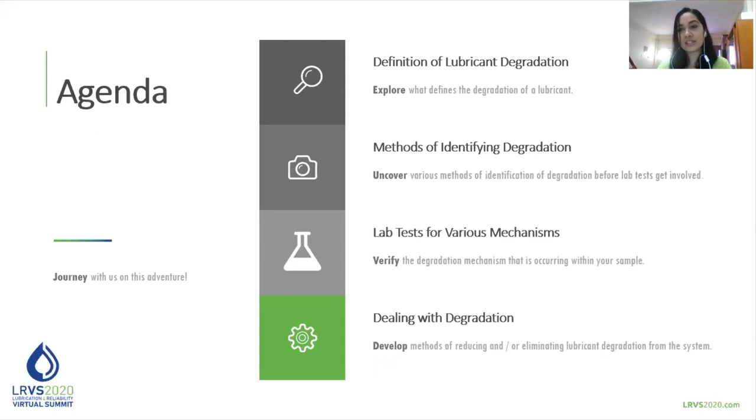And let's get into our agenda for today. So there are 4 main things that I want to focus on. The first being the definition of lubricant degradation. Now, we have to be able to define what lubricant degradation is. We have to start there. So we're just going to follow a sequence of events. So we're going to define what it is. We're going to get the methods for identifying lubricant degradation. We have to verify these things, so we need to do lab tests. And of course, we have to know how to deal with degradation. So let's jump straight into it.

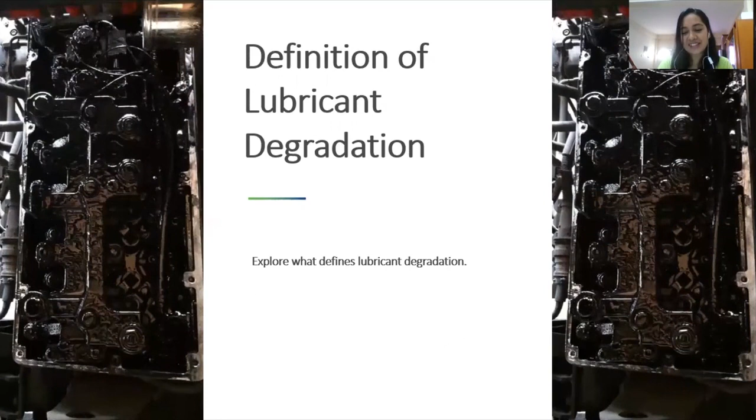Now, this is actually a picture of a diesel engine. You could tell because the oil is so dark and murky. It was an inspection that I did on a diesel engine for one of our transport providers in Trinidad. And of course, we can tell that the lubricant has been degraded. So what exactly do we mean by lubricant degradation? It's a term that people struggle with a lot. But before we even get to lubricant degradation, what are the functions of a lubricant?

Now, when we think about it logically, if your lubricant is not providing the function that it's supposed to be doing, then it's failed, in a nutshell. So ideally, if we follow that train of thought, if we define the functions of a lubricant, we can then understand why it has failed providing any of those functions.

Most people have different definitions of the functions of a lubricant. These are just 5; there are so many more out there. The 5 that I have on the screen would be to reduce friction, which is the main function of a lubricant, improve efficiency, minimize wear, distribute heat, and remove contaminants. And if you are thinking about hydraulic oils, you're actually thinking about transmitting power, so that's another function of a lubricant.

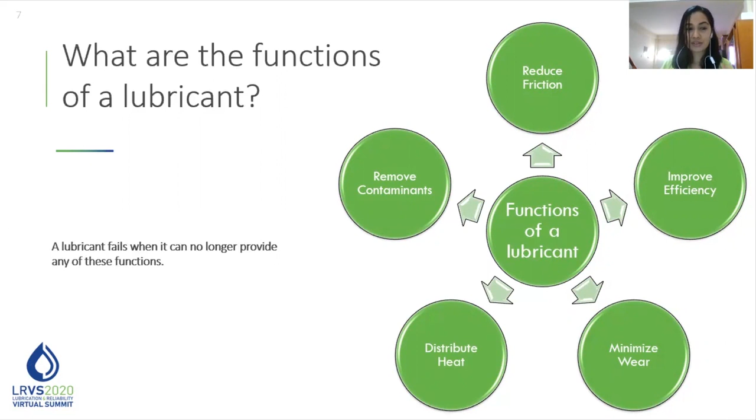If you're looking at it from the oil analysis perspective, a lubricant is a conduit of information. So if it does not provide any of those functions, essentially it has failed. So we understand when a lubricant has failed, right? That's one step. Let's think about actual degradation. Degradation happens throughout the service life of the lubricant. If it doesn't happen, then something is wrong.

I've had people tell me they've put the oil in their engines and it's still golden after about 6 months of using the engine. Something is definitely wrong there. When an engine works, it produces dirt, and one of the functions of a lubricant is to remove those contaminants and keep that dirt suspended. That is one of the reasons oil gets a darker color, if we're talking about engine oils. So if your oil is still golden after 6 months, something's wrong. It's not providing the function.

But the purpose of a lubricant in terms of degradation is that it will degrade over time. It has to degrade over time; that's one of the functions of it in a way. From the moment you put the lubricant into your equipment, you will start having degradation occurring. But there will be a point at which the degradation is at a level that the function of the lubricant is no longer served, and it can't protect the system. That's where we have an issue. So degradation occurs throughout the life; however, we need to know our limits.

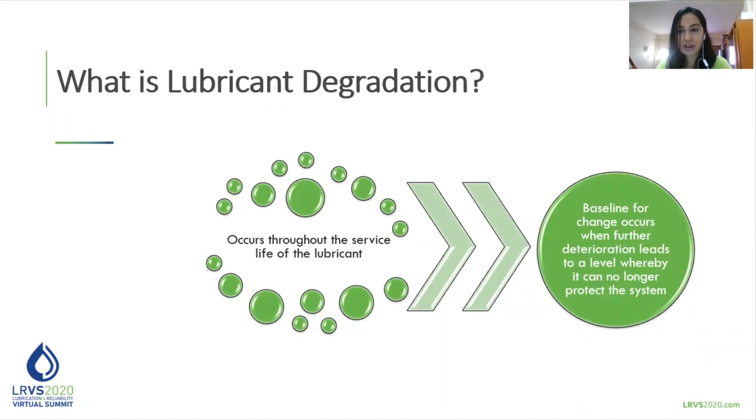Ideally, there are 6 modes of lubricant degradation. Some people argue that there are 3, but I'm sticking with the 6 because these 6 actually produce different types of things. Some people try to group them together using environmental classifications, so certain degradation mechanisms may fall under each other. But ideally, there are 6: oxidation, thermal degradation, microdieseling, electrostatic spark discharge, additive depletion, and of course, contamination, which happens no matter what. We have to try and reduce contamination as much as possible.

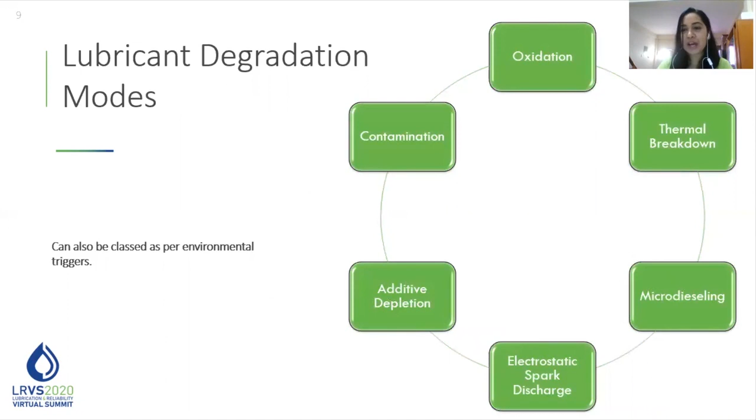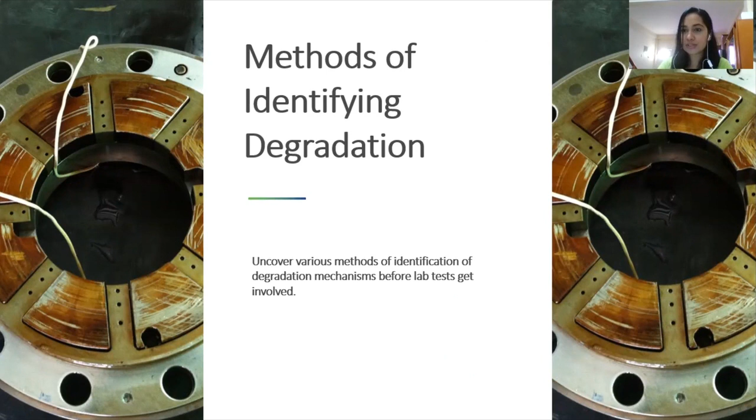I will go through these with you and help you identify the different mechanisms, because by identifying them, you can understand what is going on with your system, what we can do to help, and actually bring your system back to life in some cases. Oxidation is the one that gets the most amount of blame. Every time we have some sort of varnish or something goes wrong, somebody immediately says it's oxidation. But there is a difference between oxidation and some of the other characteristics.

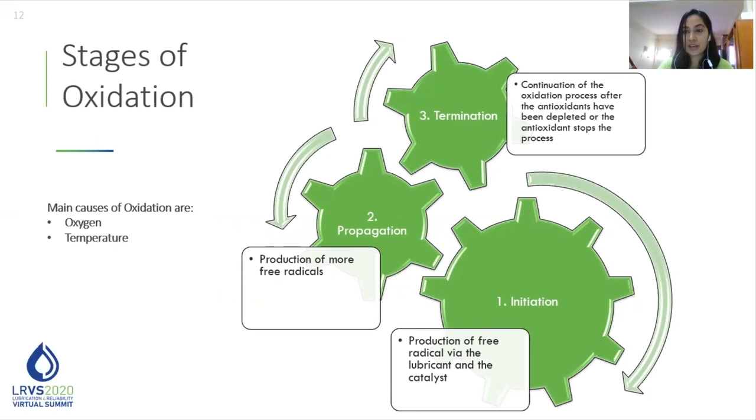So by understanding that you have oxidation occurring in your system, you can know what your results would be in terms of byproducts, and you can act accordingly. Understanding the products that may be produced when oxygen is added to the base oil helps us, because there are different stages in which oxidation could occur. For instance, perhaps your lubrication system is just now at the first stage, which is initiation.

And of course, initiation is where you have your free radical being produced. And like the name suggests, it's radical, so it needs friends. So it actually goes on to the second stage where it's propagation and it gets a lot more free radicals. And because we have this group of radicals, they go ahead and they wreak havoc throughout the entire lubricant.

And they continue doing that oxidation process until they've depleted all the antioxidants within your oil, and then they start attacking your base oil. So your antioxidants, they're like your defense mechanism, and your radicals, they go after them and they try to deplete them as much as possible.

However, if you could stop the free radical from being produced, basically stop oxidation before it started to attack your system. So understanding the different stages can help you to verify and to know where in your system you want to start with dealing with oxidation. But we will get into dealing with oxidation a little bit.

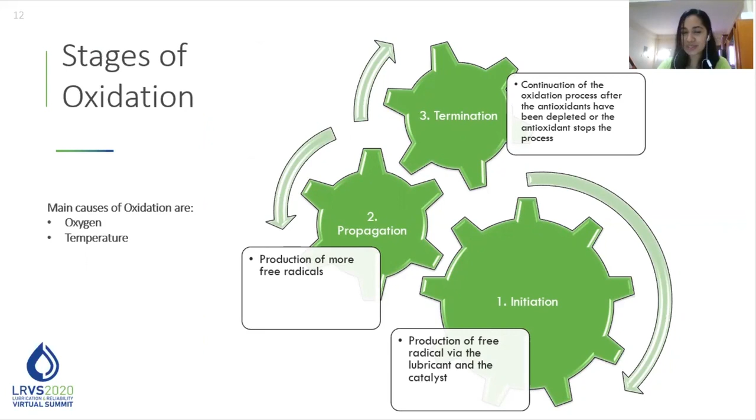Now, some of the results that we get from oxidation, you get varnish, you get sludge. And one thing that you'd realize is that you start getting an increase in viscosity. Your base oil breaks down because it's attacking your base oil. Your additives get depleted, and all your anti-foaming properties are gone out of the window. So those are some of the things that you can look for when you're looking at your results for oxidation, when you're analyzing what's going on with your system.

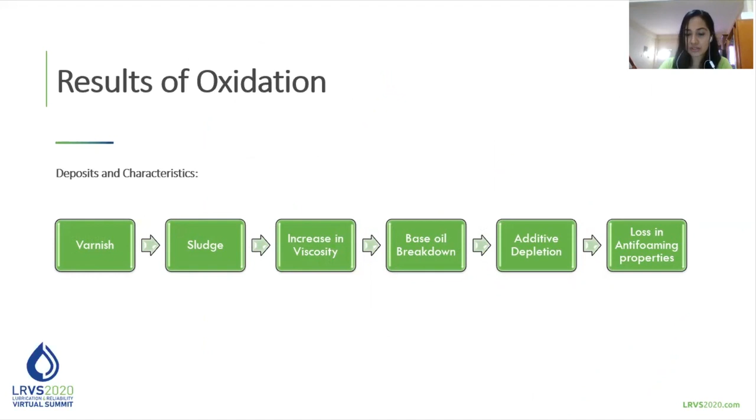Now, thermal degradation is one that is often confused with oxidation. They go together. A lot of people get them mixed up, but they're actually very different. And one of the main differences is that with oxidation, you actually need oxygen. With thermal degradation, you're looking at the thermal cracking of a lubricant, and your temperatures actually exceed 200 degrees Celsius. With oxidation, you don't have a cap on your temperature.

So in thermal degradation, what happens is that your molecules become sheared because you're telling your lubricant that we're gonna crack you. Let's think about this like in those distillation towers. They're actually exposing the lubricants to excessive amounts of heat and pressure. So your molecules are gonna start dropping off and it's gonna polymerize.

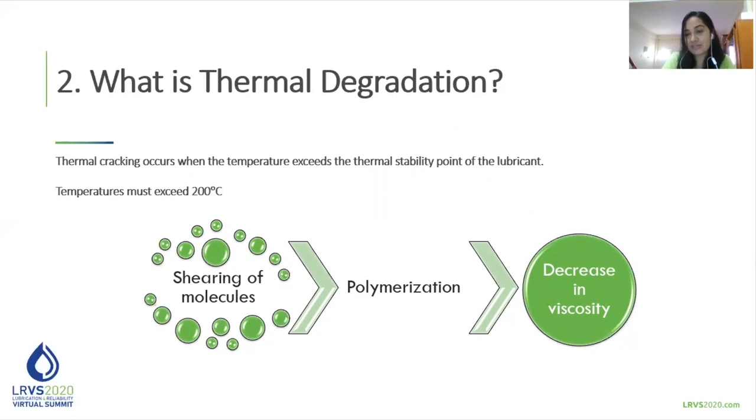And one of the main differences between your thermal degradation and your oxidation would be that you actually get a decrease in viscosity with your thermal degradation. Oxidation increases your viscosity. With the process of thermal degradation, it's actually a bit different. So when your oil becomes cracked, small molecules start coming off of the chain of your oil. And two things can happen to them.

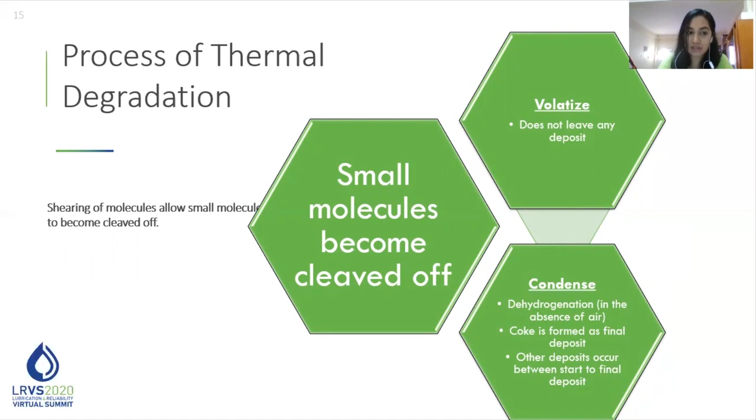Either they're volatile and don't leave any deposits, which is good in a way because we don't have as much cleanup, or they could condense and undergo dehydrogenation, and you could actually produce coke as a final deposit. So that's one of the main differences in terms of the results of what is produced by thermal degradation compared to oxidation. And I just wanted to compare that so that you all know the differences.

With oxidation, it requires oxygen. With thermal degradation, you have to have temperatures over 200 C. Oxidation, you increase in your viscosity. Thermal degradation, you decrease. Oxidation produces your varnish and your sludge. Thermal degradation, you have lacquer and carbonaceous deposits. Because remember, it's really attacking your base oil. So your base oil is really composed of carbon molecules, in essence. So you're gonna start seeing those deposits.

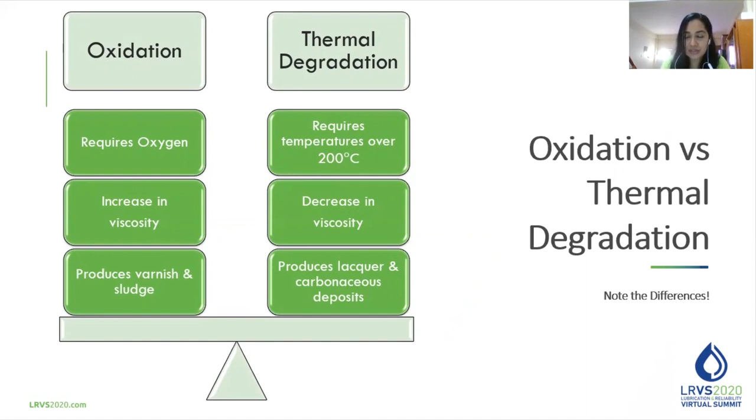Now, we're going on to microdieseling. With microdieseling, people say it is a form of thermal degradation, and it's also known as compressive heating. And what happens with that is that you actually have air bubbles that are trapped in the system. So think about when those bubbles are passing from low pressure to high pressure. What actually happens inside is that you have localized temperatures, and those temperatures could go in excess of 1000 C, which is quite a lot.

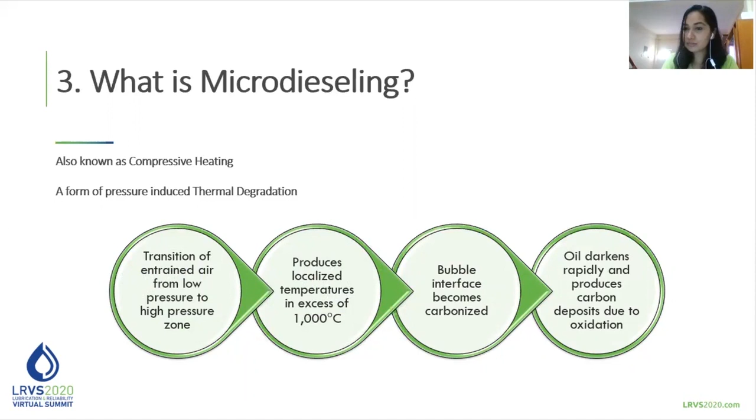And that bubble interface actually becomes carbonized. And when that becomes carbonized, that is when we start seeing your oil darkening, you start seeing change in color. And it's different because even though this is a form of thermal degradation, when the oil darkens, it produces the carbon deposits because of oxidation. So we can't exactly say that this is thermal degradation. So that's why I have it singled out as its own unique degradation mode.

And the difference with microdieseling is that it can either have a high implosion pressure or low implosion pressure. Now, what that means is that the pressure would actually dictate what happens in your system. So if you have a high implosion pressure, then the products that you're gonna get will be from incomplete combustion.

So that's what you're looking for. If you had a low implosion pressure, then you're looking for stuff like varnish, you're looking for coke, you're looking for tars, you're looking for resins. So it's a difference in terms of the pressure that the oil is actually exposed to, or rather that bubble.

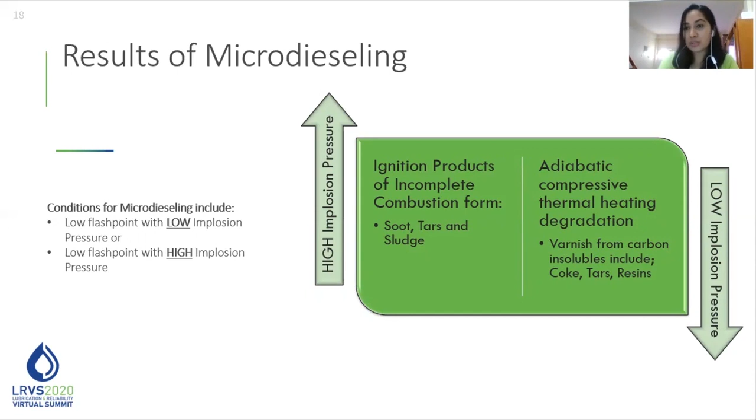Now, this one is very interesting because we have static electricity everywhere. Now, imagine if you had that static electricity inside at a molecular level in your oil. Usually if I'm walking around and I touch a door handle that is metal, I may get a shock, and that's not nice. So if that happens on the inside of your oil, it's going to be worse.

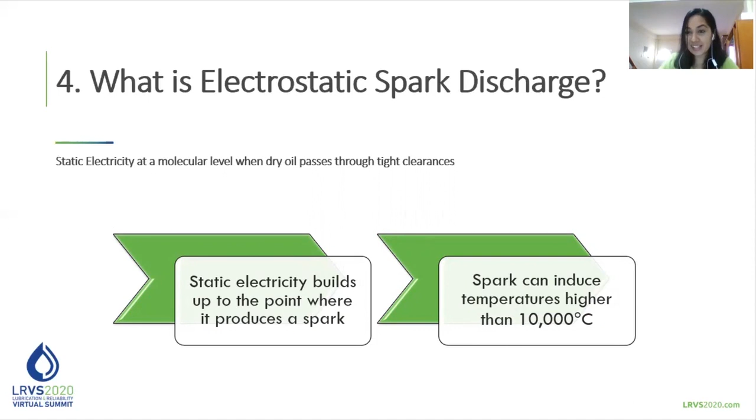And when you have static electricity at a molecular level, and you have dry oil passing through tight clearances, which just makes me think about hydraulic oils right away, it's going to be a point where all of your static electricity builds up so that it forms a spark. And now this spark could actually have temperatures in excess of 10,000 degrees C. Now, we know with lubrication, once it goes over 60 degrees C, for every 10-degree rise, oil life is halved. So imagine if it's at 10,000 degrees C, we just killed our oil.

Basically. So there are steps to ESD, of course, there are steps to all of them. What happens is that your static electricity first builds up and it produces that spark. And once it produces that spark, we have these radicals being formed again. And of course, they love friends and they will continue to polymerize your entire lubricant until it gets to a point where you just have a lot of varnish, you have a lot of sludge. Some of it may remain in solution. Some of them may drop out, they may plate out.

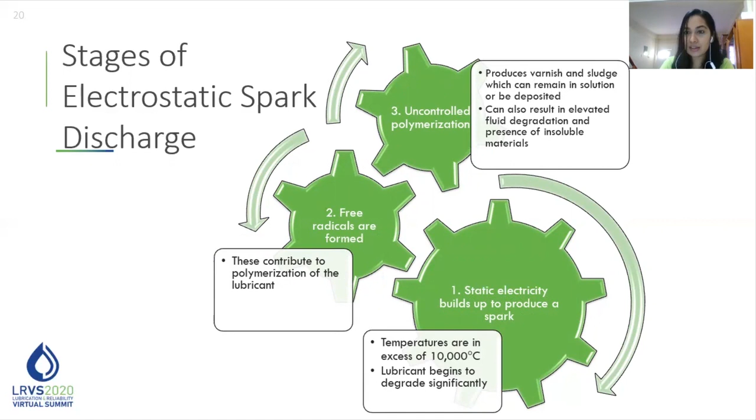But understanding that you have ESD occurring helps you to identify what mechanism you need to put into place. Because even though you have polymerization of the oil, it's not oxidation. It's because of ESD. So that's why this is a separate mechanism. And while we talked about thermal degradation, microdieseling, and electrostatic spark discharge, I want you to know some differences. Some people group all of them under thermal degradation. They may all be forms of thermal degradation, but there are differences to note.

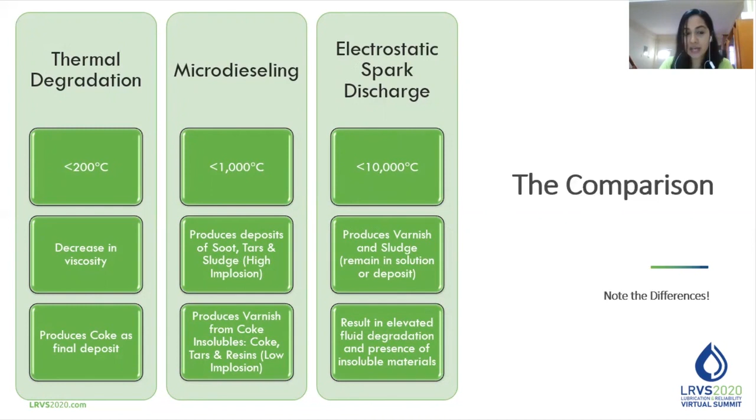And one of the main differences would be the temperatures. So if you're looking at thermal degradation, anything over 200 C. Microdieseling, it must be over 1000 C. Electrostatic spark discharge, over 10,000 C. And then you have a difference in terms of what deposits are being produced. So just be aware of that. They are not all the same. If you have thermocouples in your equipment, that helps in terms of narrowing down which one you have going on in your system. And then, of course, by the different products that are being produced.

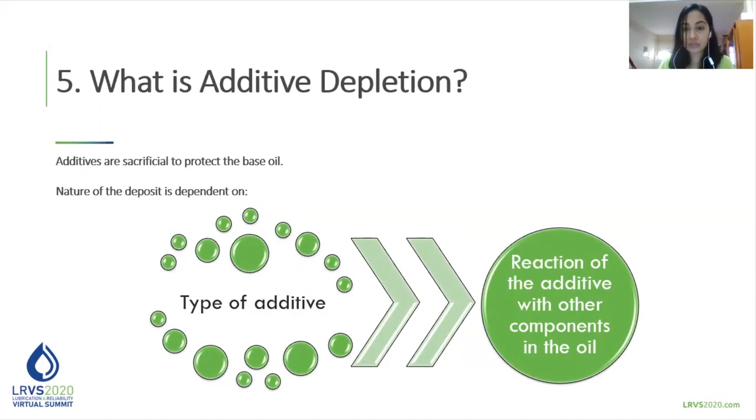If you're looking at additive depletion, most lubricants are sacrificial in nature, especially your additives. The reason that they are put into the oil is to protect the oil, to protect the equipment, but they have to be present so that they can work against the different attackers in the oil. So if you have acids in the oil, they want to fight against them. So for additive depletion, what we need to gather is the type of additive.

And with your deposits, you can have either organic deposits or inorganic deposits. Usually your organic deposits are like your rust and oxidation additives. And your inorganic deposits could be like your ZDDP, which is used to reduce wear, very important for your gear oil systems. And they may not react with anything else in your system, which is good because they just drop out and they stay there. That's helpful as well. But understanding the actual type of deposits helps you understand which additive has actually dropped out or been depleted.

Another degradation mechanism would be contamination. Now, people don't think that this is a degradation mechanism, but by understanding what contamination is, we can understand that it leads to different types of degradation mechanisms. So any foreign material that enters your lubricants and that can be used as a catalyst for degradation, that is contamination as a degradation mode.

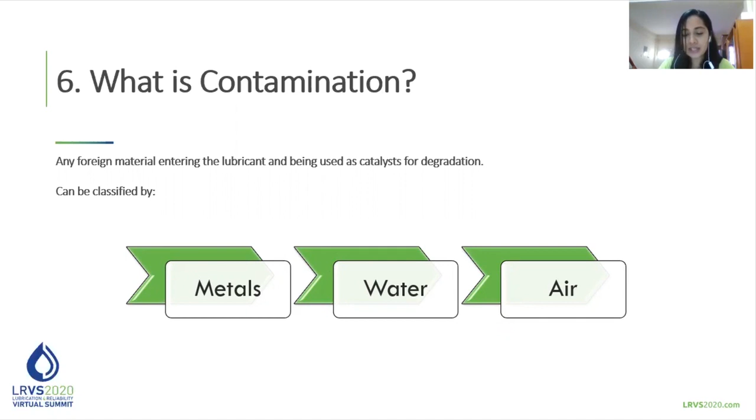And usually we classify those based on metals, water, and air. And what we've realized is that a lot of the times your contamination degradation can lead to different modes of degradation, usually in the form of oxidation, thermal degradation, or microdieseling. So that's just a bit of an introduction with the different modes and the different types.

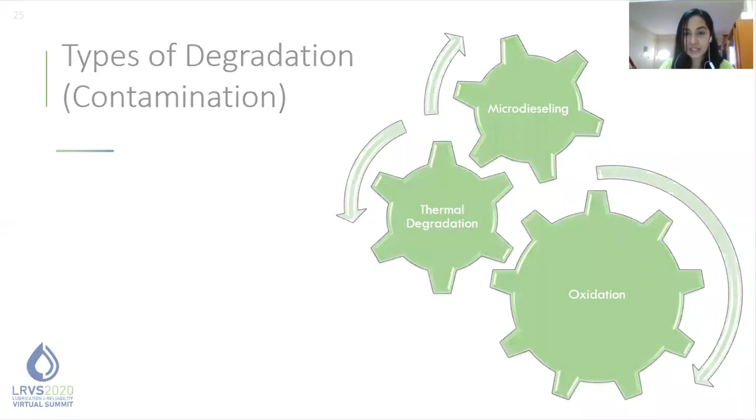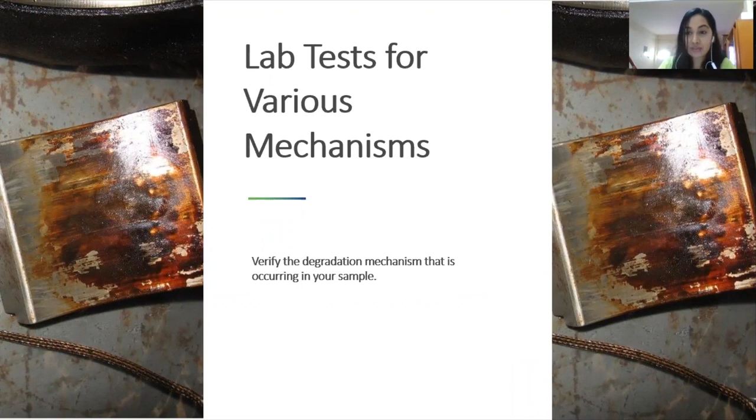Now, for the interesting part, the lab tests. Knowing which lab tests you need to administer for the different degradation mechanisms actually helps, so you're not just doing a million different lab tests and trying to figure out what is going on. If you have an idea of how the degradation process occurs, then you can figure out what's going on with your system and do your own troubleshooting before you spend a lot of money in the lab on tests that won't give you results that help you verify which type of degradation mechanism is going on.

Now, oxidation is usually one of the first bad actors that are called out almost all the time. And what I just want to reiterate is that if your oil has degraded to a point where you're now doing the testing, you may not get as valid results as you would have if you started doing your testing from the moment the oil went into the sump.

And with oil analysis, trending is very, very important. So if you don't have a base to compare it against, then you're kind of shooting in the dark. You're saying, well, I don't know what happened in my system before, but something happened now. And while you may want to compare it against what your oil supplier or your OEM has, the oil would have been under pristine conditions before it was in any equipment. So using that as your base to compare against is not the best thing to do.

However, if you are putting new oil into a sump, I would always recommend waiting 24 to 48 hours, then take a base sample. That's your base sample, and that is representative of what is going on with your system. And it's important to know that because your system is going to be different from somebody else's system. So it's very important to have your baseline sample and then compare against that. And different types of equipment would have different schedules for sampling and doing their comparisons.

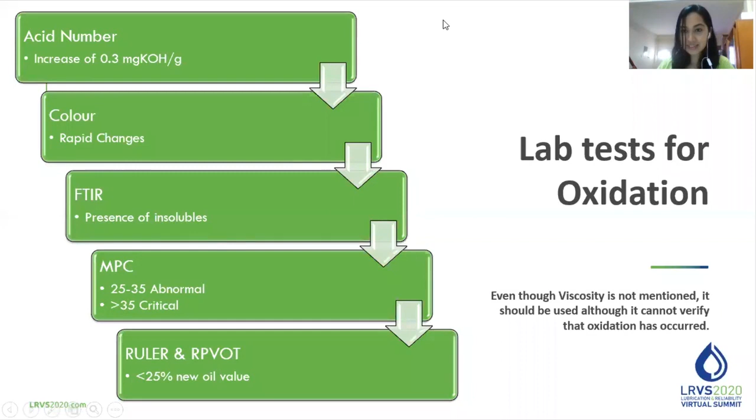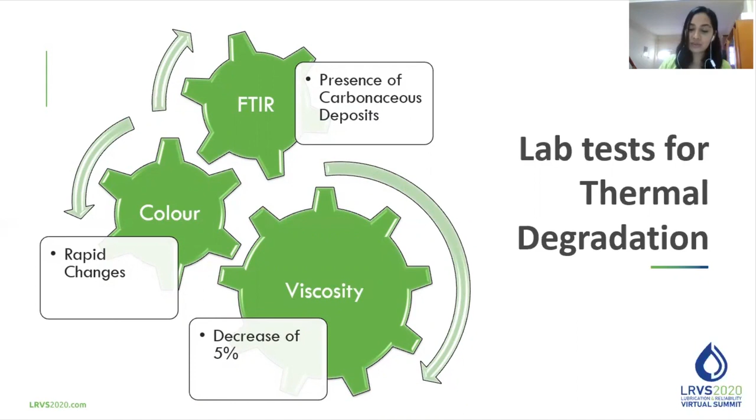And now for your thermal degradation. Now remember, we kept saying the differences between thermal degradation and oxidation. And one of your main differences would have been your viscosity test. Now, if your viscosity decreases to about 5%, and we start seeing rapid changes in color, and we confirm with FTIR that we have carbonaceous deposits, you have thermal degradation definitely going on there. Also verify, if your viscosity decreases, that it's not a contaminant that's decreasing your viscosity. So definitely something to keep in mind.

When you're looking at microdieseling, remember this is the entrainment of air moving from one part to another part of your system. So the first thing you want to do is do a visual inspection of your components and check if cavitation is present. If you have cavitation present, you definitely probably have some form of microdieseling going on there. That's even before you get to the lab.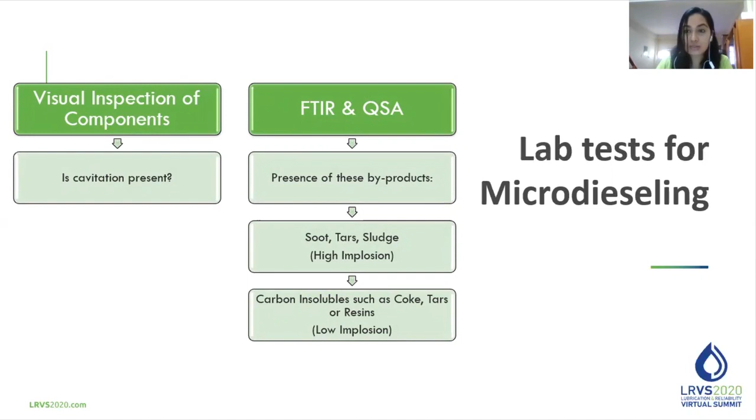And if you want to confirm, you can do your FTIR and your QSA test and just look for the different types of byproducts. So you're looking for, if you had a high implosion, soot, tars, sludge, and of course with low implosion, you're looking for carbon insolubles such as coke, tars, or resins. So that's what you're going to be looking for and the tests you have to do for microdieseling.

On the other hand, if you have electrostatic spark discharge, and I mentioned earlier that this usually happens with hydraulic systems or even with turbine systems. And what a lot of the guys say is that they start hearing crackling every time they walk past the equipment. So that is another indication that you may have electrostatic spark discharge going on.

And a great way to confirm this is by looking at your filters. If you have ESD occurring, your filters are going to get these burnt patches and you're going to start seeing clogged membranes. So that's a great indication that you have ESD going on before you even get it to the lab.

To do your confirmation, of course, you do your RULER test because your antioxidants are going to be depleting like crazy. Just because you have that going on, you check your dissolved gas analysis and you look for acetylene, ethylene, methane. These are what are usually produced with ESD. And of course, you check for your varnish, check for your sludge, check for your insoluble materials. FTIR and QSA, great tests for those.

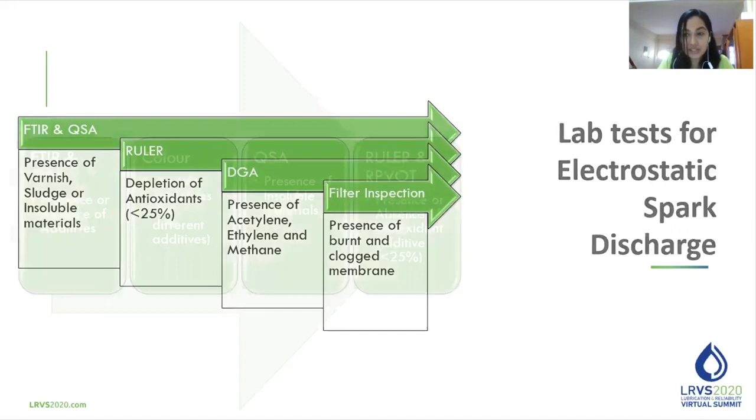And if you're looking at additive depletion, remember we spoke about this earlier, where different additives would deplete at different rates, and we don't know which exactly would be depleted. But some tests that you can use would be your FTIR and your QSA. Again, FTIR is very, very good for this. And some labs actually have the color that would be associated with different additive types. So it's a great indication if you see a change in color and you note the color change. So sometimes if you see like an orange or a red, you'd probably have some different type of additive being depleted and it's showing up in the oil.

Of course, your RULER and RPVOT are great for understanding the presence or the absence of your antioxidant additive, because those are perfect for that. And you have your QSA to determine if you have some insoluble materials.

With contamination, the first thing we can tell usually is just by a visual inspection of the sample. Most times, if it's contaminated, we can see it right off. And this would be the ingress of any foreign material. Sometimes a change in color actually helps. It could be that the oil turned green because there was a green coolant involved that contaminated it.

Or it could be that the oil turned a different color, that is, perhaps it was a turbine oil, which is mainly clear or a lighter color, and the oil was a slightly golden color. It could have been contaminated with a gear oil. So color is important, but definitely get it to the lab and check out what exactly they have going on the inside there.

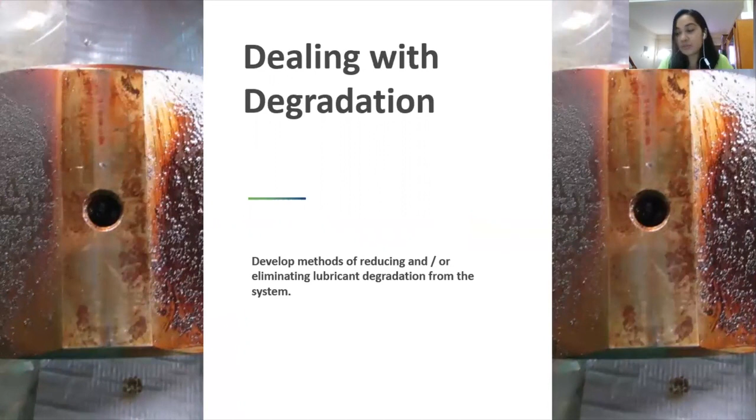And that is critical because that's the main question people ask: what do we do now? We know we have all of this going on, what next? So one of the main things that you have to do is understand your equipment. So understanding your equipment, determining the applicable tests, interpreting the results, and of course, implementing your different measures. And all of these, we can't have a standard cookie cutter approach for this because they change depending on your organization, depending on your budget, depending on what is critical to your organization or not.

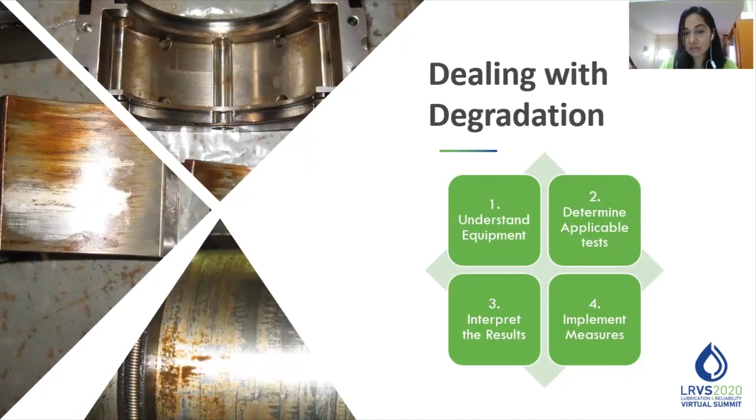So when we look at understanding your equipment, what I like to do is actually classify this in terms of critical, semi-critical, or non-critical. If we had a failure in the past and oil analysis helped us to identify that the failure was occurring, then people may say, okay, let's do oil analysis on every single piece of equipment. While that sounds nice, it's not necessary if we have equipment that are non-critical, in that they have a secondary, they have a backup. So oil analysis on a basic level may be fine, but we don't want to perform RPVOT, which is a bit expensive, for a non-critical component.

So dividing your assets into critical, semi-critical, and non-critical helps you to understand where you want to put your focus on. And criticality can mean different things for different people. So if we're looking at the fleet industry, a critical piece of equipment could be a truck that has to do a job for a client that could only be done at that time. Or it could be a truck that if it doesn't run, the business doesn't get a profit or it's contracted out. On the other hand, if you're looking at a manufacturing industry, criticality there can mean if that component goes down, the entire plant goes down. So it depends on what criticality means to you and how you classify your equipment for understanding it and then assigning your different lab tests to it.

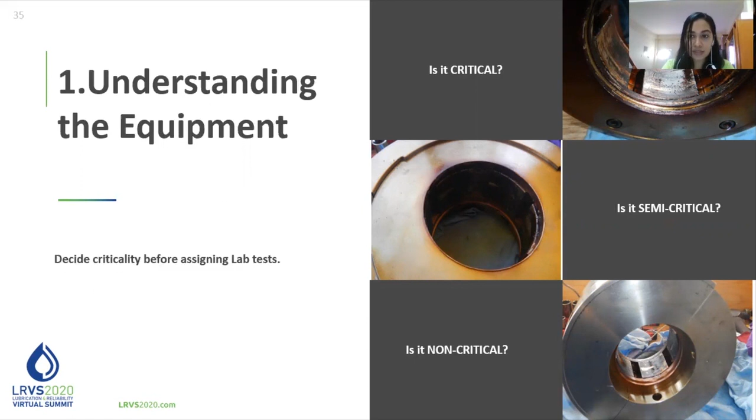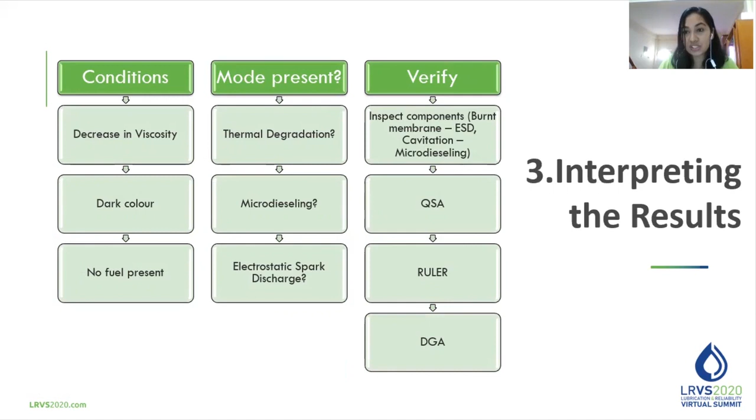So always good things to do when you're sending off your samples: give a note. Say what you've seen, say what you haven't seen. And while you may think that it's not helpful information, it's actually very, very helpful. And it gets them to understand what exactly they want to do the test on.

And we know after we've done that, we have to implement measures. And you can't just do cookie cutter again, because it depends on your system and depends on what degradation mode you've seen and how the degradation mode has actually occurred. And one of the first things a lot of people say is go straight to chemical filtration. And chemical filtration removes different things from your oil. But what I would say with that one is definitely you need to analyze your system first, ensure that that is the best way forward, and then employ chemical filtration. Usually people use that when they have oxidation problems.

In some cases, and you definitely need the OEM approval for this, if you adjust your clearances in your bearings and some of the other smaller areas, this helps to reduce your temperatures. And why we want to reduce temperatures is that that's where we have thermal degradation occurring. That also helps with oxidation. So by just adjusting those clearances, you actually increase your flow rates of your oil, so you decrease your temperatures significantly. But you need OEM approval for that, so that may take a bit of time.

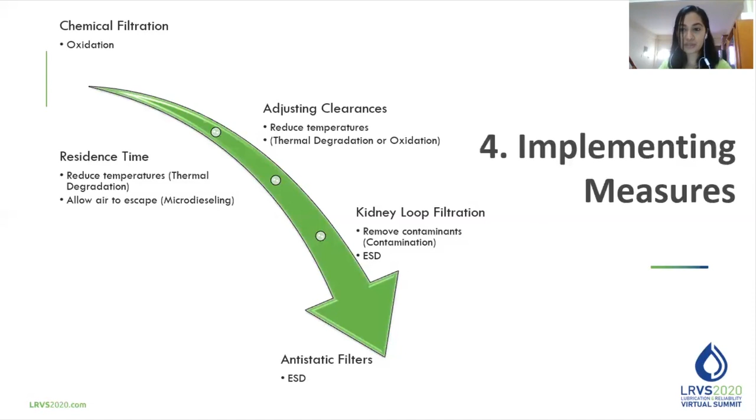And that is it from me today. I really hope that you learned something. If you take away anything from this, then let it be that there are different types of degradation mechanisms, and we need to be aware of all the different types of them, use that wisely, and understand what's going on with your equipment. Always go back to what's going on with your equipment and your system.